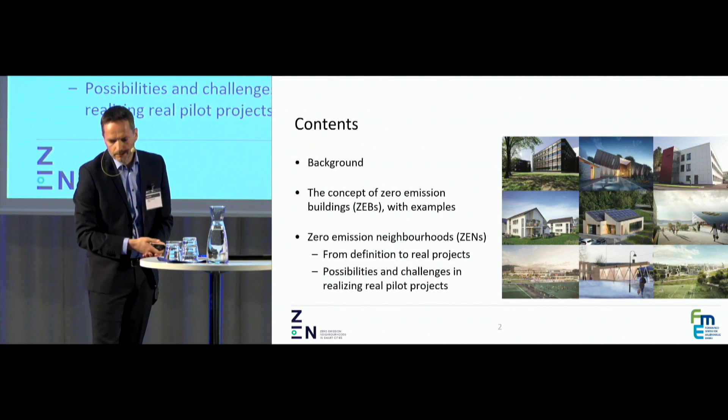So first I will give some background. I always have one or two slides on the background before I get more into zero-emission buildings and zero-emission neighborhoods. This background most of you know, of course. Why do we work with zero-emission buildings?

Energy use in the European building stock amounts to about 40% of the energy use, and 35% of the greenhouse gas emissions. We see some different numbers now and then, but it's close to this. Another important number when you look at buildings and the construction industry is that about 50% of the extracted materials are attributed to this sector. So the conclusion is we need to look at more sustainable ways to develop, transform, and make buildings.

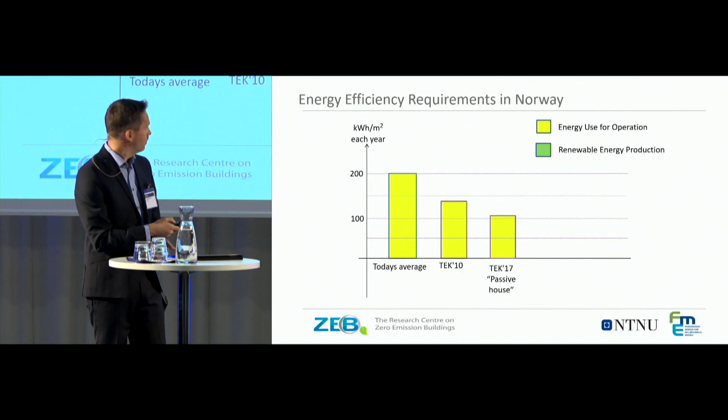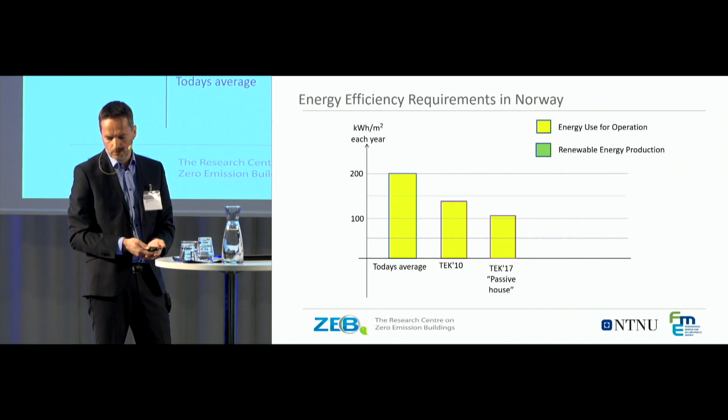If you look at the energy use in Norway for the building stock, we see that the average is around 200 kilowatt hours per square meter per year. There has been a gradual increase in the requirement. In 2010 it was reduced to below 150, and in 2017 it was reduced to close to 100 kilowatt hours per square meter per year.

And if you look forward, I think we can assume something like this: in 2020, nearly zero energy, although this could also be defined differently, and also by 2025, maybe zero energy.

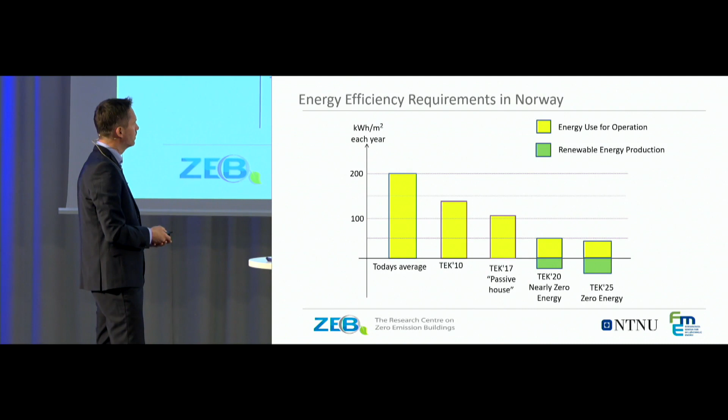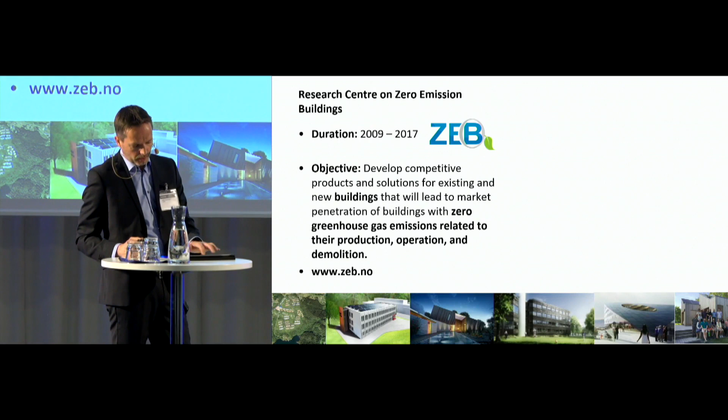However, in Norway, for the last 8-9 years, we have been working on the zero-emission building concept. The objective has been to develop competitive products and solutions for existing and new buildings that will lead to market penetration of buildings with zero greenhouse gas emissions related to their production, operation, and demolition. So we look at the whole life cycle of the buildings in this center, and this is also an innovation center where we work closely with the building industry.

Then a couple of years ago, we also started another initiative looking at the interaction between the buildings and also including the energy companies in our research. We also include the municipalities and ICT companies doing this research. So there's a lot of collaboration going on.

Then back to a zero-emission building - what is that? During the first phase of our research center, the previous one, we made preliminary definitions of a zero-emission building, which we refined and further developed throughout the 8 years. A lot of the work was done together with the partners as they realized or built real buildings with them, so we tested the definitions and saw what was possible.

The ultimate aim is to have new renewable energy production on the building or near the building that should compensate for the emissions related to the materials used during the life cycle of the building, the construction phase, the use phase, and also taking into account the demolition phase. So to be a full zero-emission building, the renewable energy production should be larger than the sum of these.

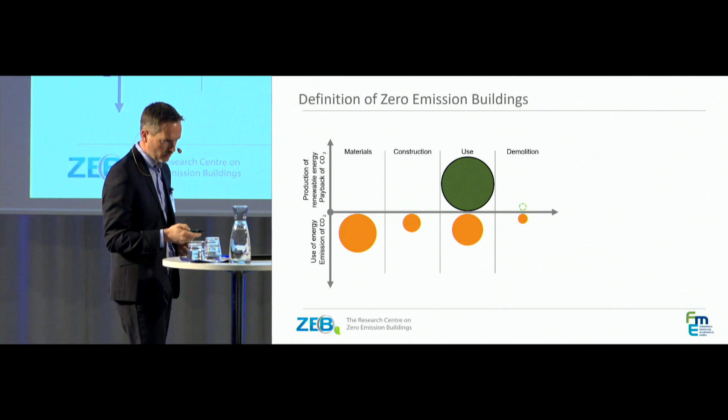Another interesting note here is that the emissions related to the materials are almost the same size, or even more, than those related to the use phase of the building. So working on the life cycle and working on the materials, finding environmental solutions, is just as important as having an energy efficient building.

But we also see that this is a very ambitious target, and because of that we have made some alternative ambition levels where we have less renewable energy produced on the building or on the building site. So this one we call a zero emission building in operation, because the size of these two is about the same.

And then if we increase the amount of renewable energy, we can have renewable energy to compensate for the operation and the materials. So then it's the zero emission buildings with operation and materials, ZEB-OM. And we can also go further to increase it even more.

So we have worked with companies and built buildings that follow these ambition levels and this calculation procedure, up to what we call ZEB-COM - zero emission buildings compensating for construction, operation, and materials.

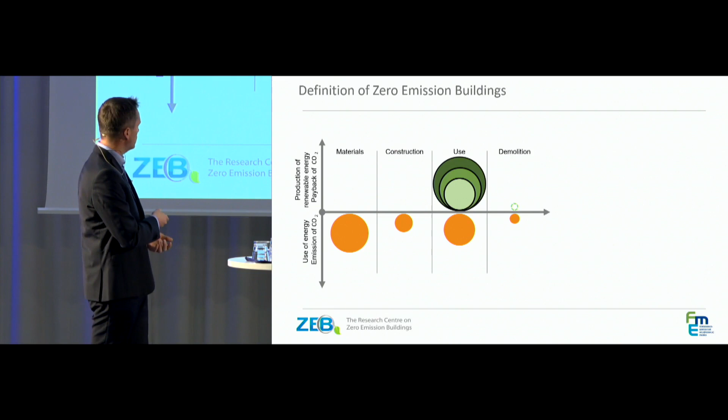And what we see is that this promotes several things. It promotes reduction of greenhouse gas emissions. It promotes energy efficient buildings, reducing the energy use and emissions related to the use phase. It promotes new local renewable energy and also reduction of material use - if you reduce the amount of materials, you reduce emissions. And it also promotes the use of more environmentally friendly materials, as well as optimization of energy flow.

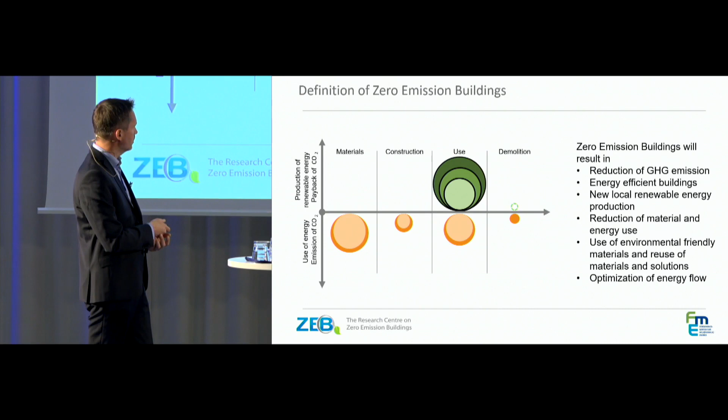These are the different ambition levels tested on the different pilot buildings, starting with ZEB-O minus equipment, where we subtract the plug loads that vary from building to building, up to ZEB operation, and all the way up to ZEB-COME, taking into account construction, operation, materials, and end of life, which is the most ambitious level.

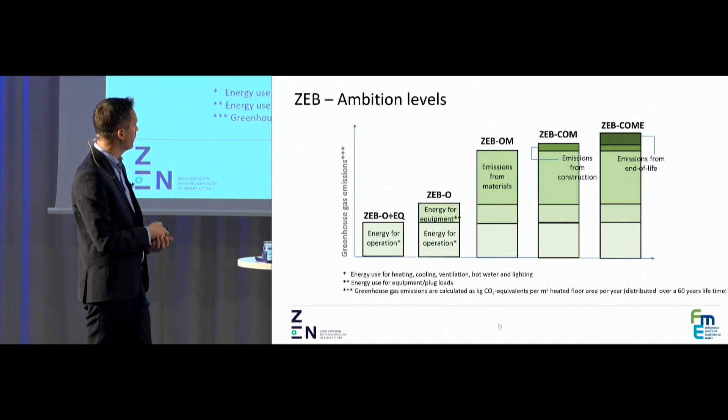Just some examples. This is one pilot project from close to Oslo in Sandvika. It was an office building and a renovation project built in the 1980s. What they did here, they aimed for this ZEB operation and materials level.

We took out the plug loads. They reused the concrete structure, which of course makes sense, and also reused a lot of the external glass materials in internal walls. They also used quite a lot of wood in the facade, a combination of natural and mechanical ventilation system, and also a lot of PV photovoltaics, solar panels on the roof of this building, as well as on a garage nearby.

Looking at the energy use of this building, you can compare it to what it would have been if you built it according to the standard at the time, Technical Regulation 2010. It would have been slightly below 150 kilowatt hours per square meter per year. Here it's a totally different picture, and we also take into account the energy used for material production.

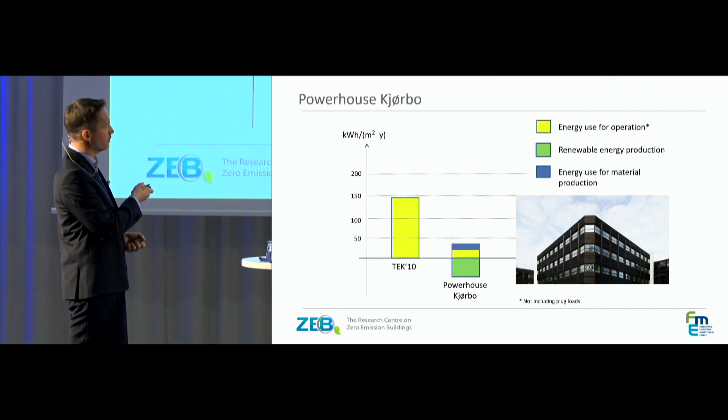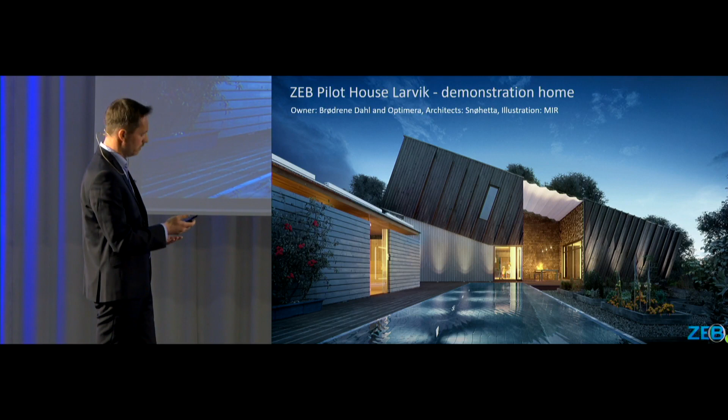Another building, a residential building, a demonstration home in Larvik, even further south of Oslo. Here the architect is Snøhetta, as it also was in the previous building. For this building, they aimed for the ZEB operation and materials ambition level.

This is a new building, a new dwelling. They also tried to reduce the material use and reuse other materials. They also combined different systems like a heat pump, photovoltaics, and solar collectors.

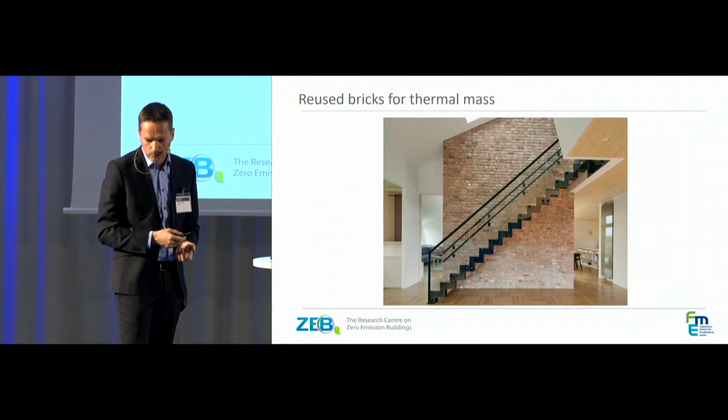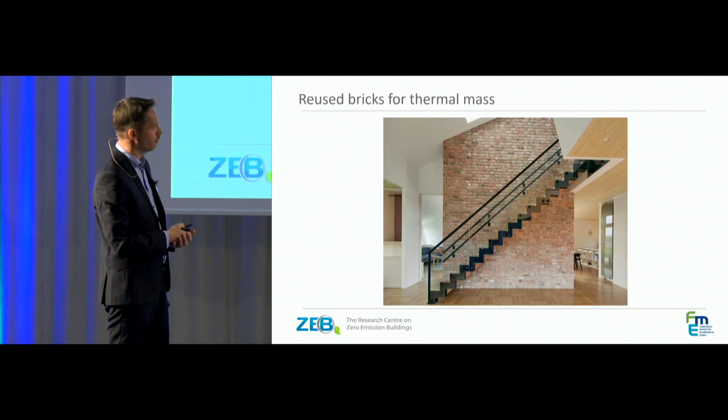Just an example of what we can do with the material emissions if you address this in more detail. The original plan for this building was to have a concrete core, a concrete wall, to introduce thermal mass to the building, to level out the temperature fluctuations. But looking at this concrete, it would contribute quite a lot to the carbon emissions from the materials.

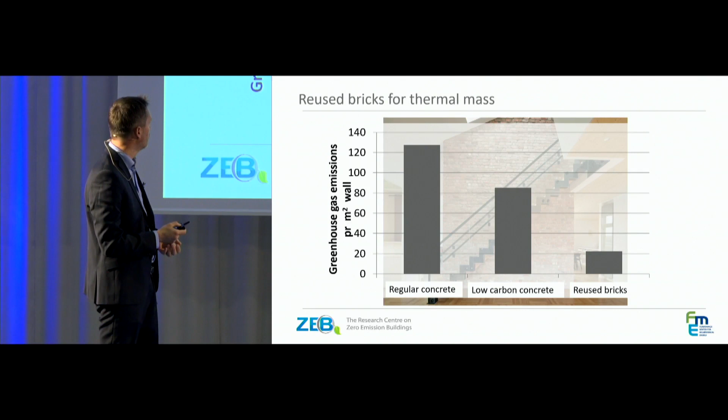When you look at the material emissions, this takes into account that you have to replace materials during a 60-year lifetime. You assume a 60-year lifetime of the building, and then you divide that by 60 years, and you get this number.

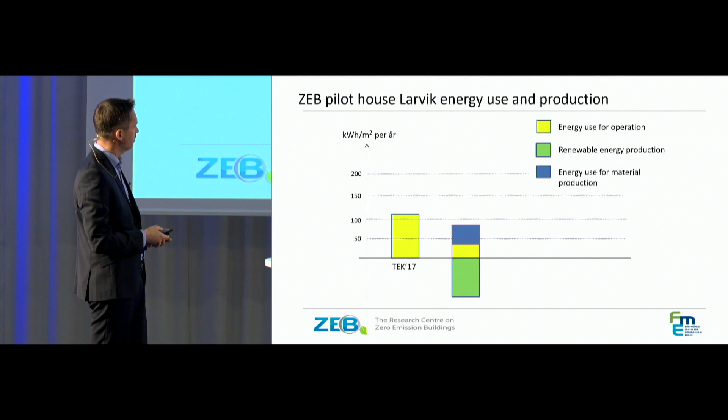Okay, then a bit more on our recent work on zero-emission neighborhoods in smart cities. I've seen some information about the MODER project, and I think there are some similarities between these activities.

So here we stop to look at individual buildings. We still have to work with individual buildings, but they will be elements in the energy system, using energy and also contributing energy if that is possible.

To address this topic, we have divided the work into six work packages. In work package 1, we are looking at the development of an analytical framework for design and planning of zero-emission neighborhoods, also looking at policy measures, innovation, and business models. Work packages 3, 4, and 5 look more at the technological side of developing a zero-emission neighborhood.

Work package 3 is on responsive and energy-efficient buildings. Work package 4 looks at interaction between buildings, how one can use energy from a neighboring building, for instance. Work package 5 looks at optimization between the neighborhoods and the larger energy system, analyzing if it makes more sense to invest in local sources versus more centralized sources, like windmills on the Norwegian coast, for instance. In work package 6, as in the previous center, the ZEB center, we have a lot of pilot projects and work with our partners on this.

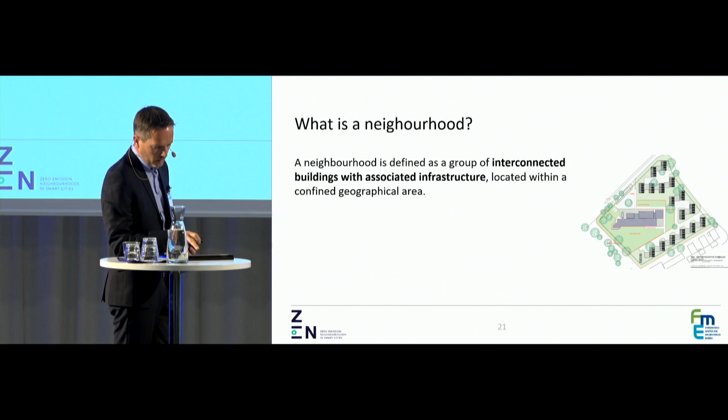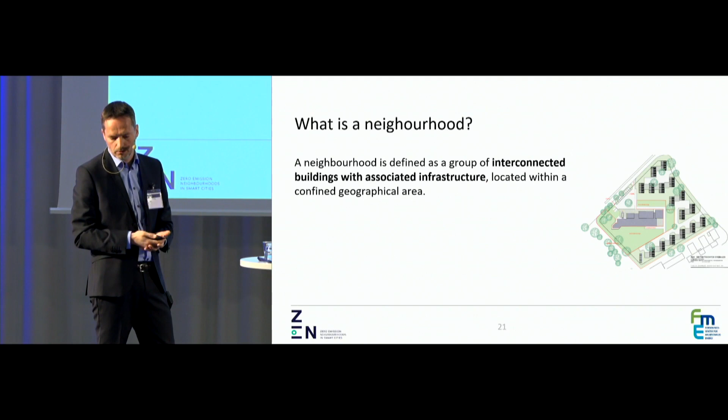So how do we define neighborhood, and then a zero-emission neighborhood? This is something we have recently worked a bit on. A neighborhood is defined as a group of interconnected buildings with associated infrastructure located within a confined geographical area. So we take into account also the infrastructure between the buildings, and would like to compensate for the emissions, or at least address and reduce the emissions related to this. The buildings can be new buildings, existing buildings, or usually a combination of this.

We look at the exchange of energy, generation of energy, storage of energy inside the neighborhood, and also interaction with the surrounding energy system, and also include the grids and technologies for water, sewage, waste, mobility, and ICT.

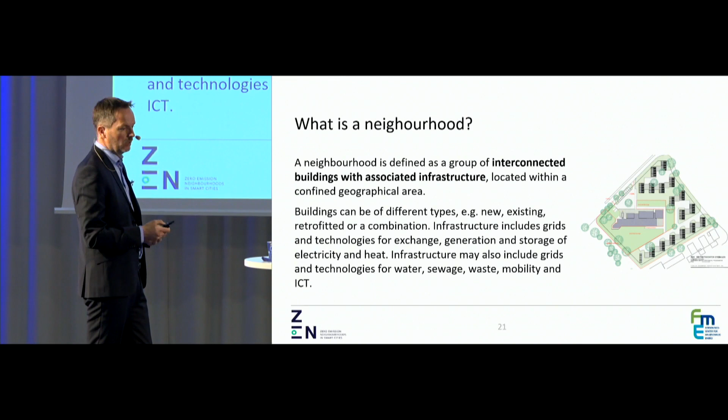Specifically, we address 7 different areas that will be broken down into KPIs, but I will just show these areas now. First, we plan, design, and operate the buildings and associated infrastructure components towards zero life cycle greenhouse gas emissions. We still look at the life cycle of the system, using 60 years for buildings and 100 years for infrastructure, which is common according to international standards. So greenhouse gas emissions is still on top.

In addition, we look at energy efficiency for the buildings and the associated technologies, and also installation of new renewable energy in the area.

Further, we need to manage energy flow and interaction with the surrounding energy system in a smart and flexible way, looking at how these neighborhoods and buildings can be an active element and reduce the strain on the grid.

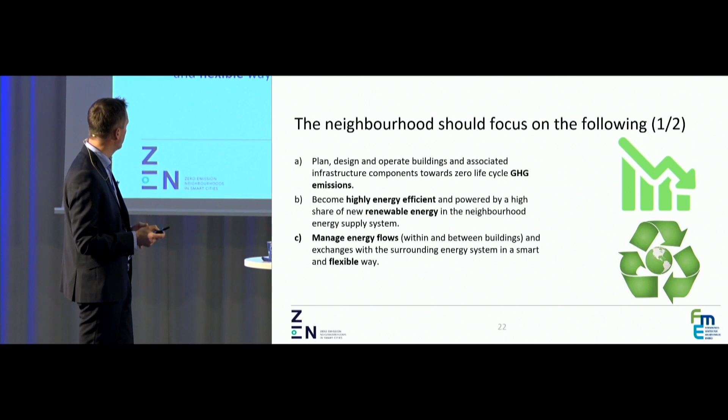And also to promote sustainable transport patterns and smart mobility, so also looking at, for instance, how electrical vehicles can be a resource in this neighborhood energy system.

Further, we need to plan, design, and operate with respect to economic sustainability, by minimizing total life cycle costs and life cycle system costs. We have industry partners that focus a lot on this aspect. We also discuss how the cost of technologies in the local system should be compared to the total system cost. So this is also an important research question.

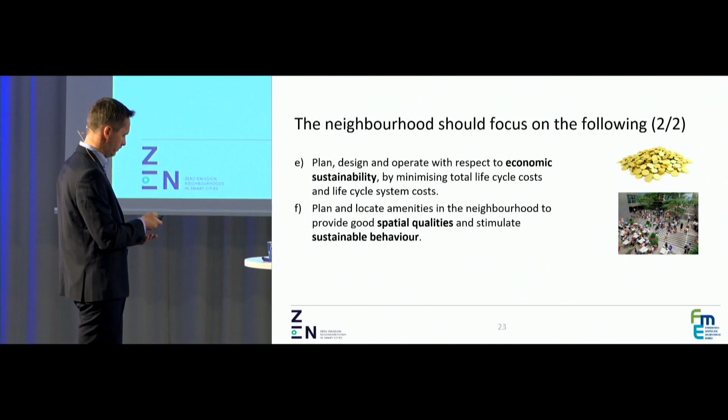We also have to plan and locate amenities in the neighborhood to provide good spatial qualities and to stimulate sustainable behavior, so starting to include the users and citizens in the planning is important. And then also to look at innovative solutions.

Both these centers, this Zero Emission Building Research Center and the Research Center on Zero Emission Neighborhoods, are part of a funding scheme by the Norwegian Research Council that promotes or should result in innovation. So that's the reason for the last point.

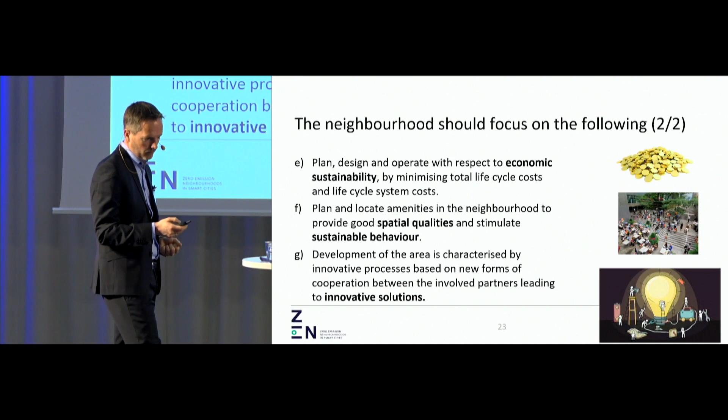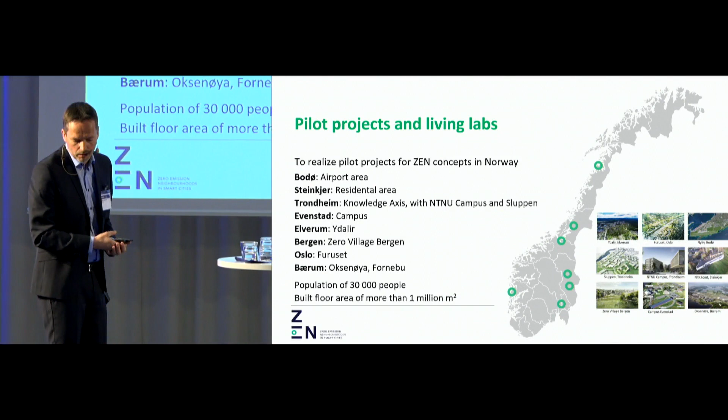Then we have, as I said, some pilot projects. We are working with municipalities, energy companies, building developers, and building owners in 9 different pilots. The pilots are located from Bodø in the north to Bærum in the south, which is close to Oslo. And they have allocated 9 areas that we should look at and work on.

This also works as innovation hubs and inspiration for other partners in the project. We have about 30,000 people involved in these areas, and also a floor area of more than 1 million square meters. These are different kinds of areas that we have selected based on different criteria.

There are some new developments from the start - for instance, Zero Village Bergen is a totally new development with a private partner. We also have a combination of new and existing buildings that need to be developed, for instance Sluppen and Furuset in Oslo, where we also consider social aspects of the developments.

In Bodø, they are actually moving an airport and want to free up space for future city developments because of this. So it's a mixture of different kinds of developments that we address.

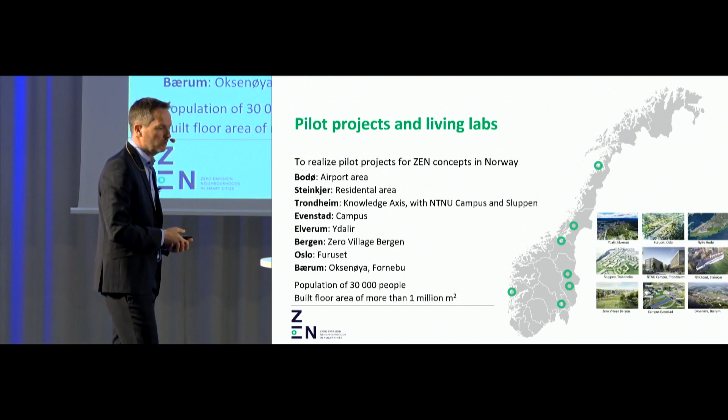Also, if you're going to exchange energy between the buildings, at least thermal energy, you would like to have a district heating system in place. This is not usually the case always. There are also regulatory barriers for exchange of energy, especially between end users, and that's at least how it is in Norway.

There's also a need for technical and legal standardization to make this happen, especially when using different technologies. On the tool side, a lot is happening these days with moving to districts and areas when planning for the future. But there's still a lack of, especially, emission data connecting to infrastructure and also for a lot of building materials and products.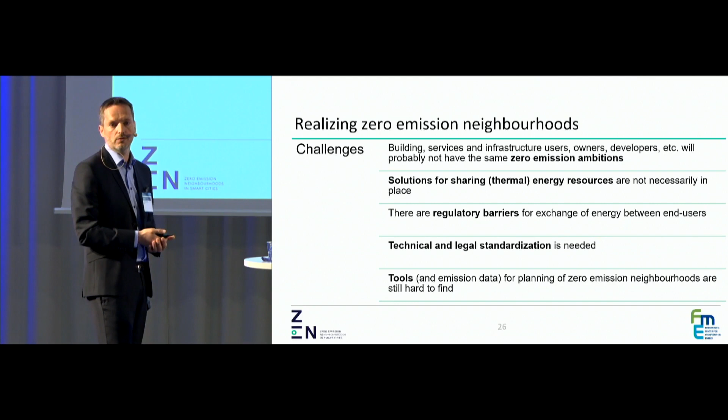But there are also some possibilities. What we think is that optimization on energy use and renewable energy production should be easier and make more sense when we address a larger system than when we address individual buildings. That's one of the main motivations for doing this zero-emission neighborhood center. Also, focusing on the neighborhood instead of individual buildings, you get to tackle the infrastructure between the buildings and supporting the buildings.

Installation of new renewable energy technologies can be easier when addressing an area instead of individual buildings. Neighborhoods are also more suitable for implementing integrated and innovative solutions in direct connection with citizens. Compared to a larger city, it's easier to engage with citizens on a smaller scale. The main aim behind this is also to speed up the decarbonization of the building stock, which I think is easier and could be done quicker if you address several buildings instead of individual buildings.